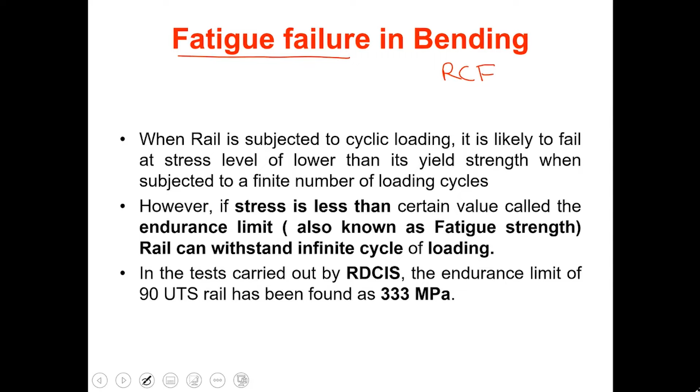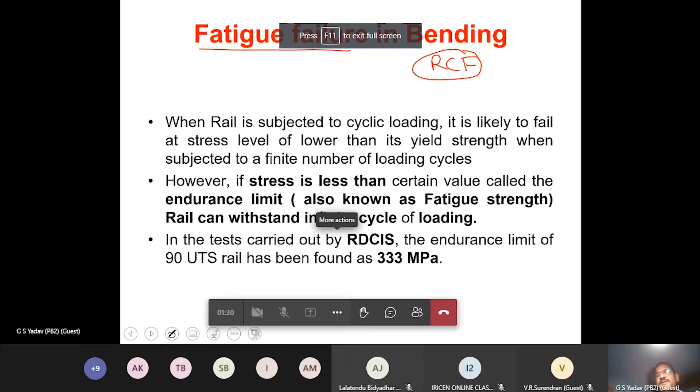As we discussed just now, it is unavoidable to have this because you cannot have the rail strength where the contact stresses can be less than the strength of the rail. It's not possible to have that kind of rail. So RCF is part and parcel of our life, it has to be there. Rolling contact fatigue failures have to be there.

Only thing is they can be controlled by rail grinding. That's why for higher axle loads, rail grinding is a must. If we are going for 25 ton axle load and if we don't deploy the rail grinding, our rails will fail at very low GMT.

These are basically, I cannot discuss these things in detail because this is about the fatigue phenomena and that takes a lot of time to discuss everything. I just explained you the basic concepts.

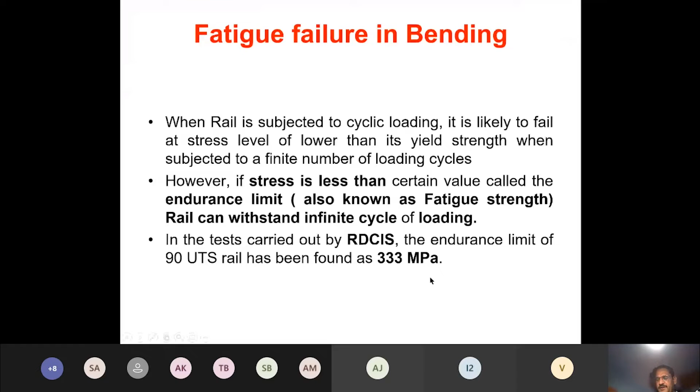But now our rail is subjected to the constant stress that I told you. Constant stress such as residual stress, thermal stress, and some other kind of stress, such as those flex laying of rails on curves. So our rail is not only subjected to the cyclic loading, it is subjected to the constant stress also.

So our loading is not fully reversible, right? It will have more value towards tensile stresses, less value towards compression stress, especially at the critical location, which is the foot center in our rail.

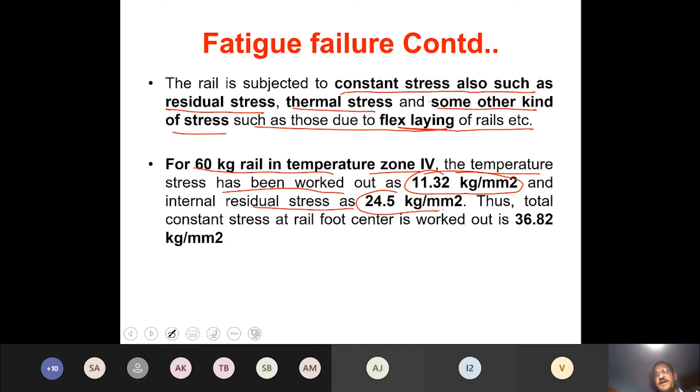And for 60 kg rail in temperature zone 4, we have calculated that temperature stress is 11.32 kg per millimeter square. Residual stress is 24.5 per millimeter square. Thus, the total constant stress at rail foot center, this is the critical location for our rail, is worked out as 36.82 kilogram per millimeter square. So this is sort of a constant stress.

Here, constant does not mean like always this is the stress, because temperature stress will not be available always, but it is available for a longer duration as compared to the wheel loads. So we take this as the constant stress, the 36.82 kg per millimeter square.

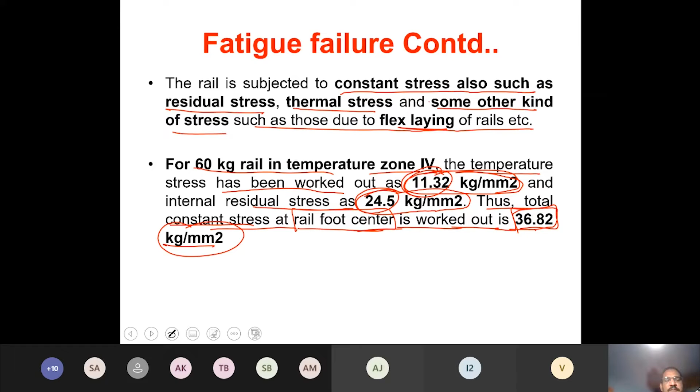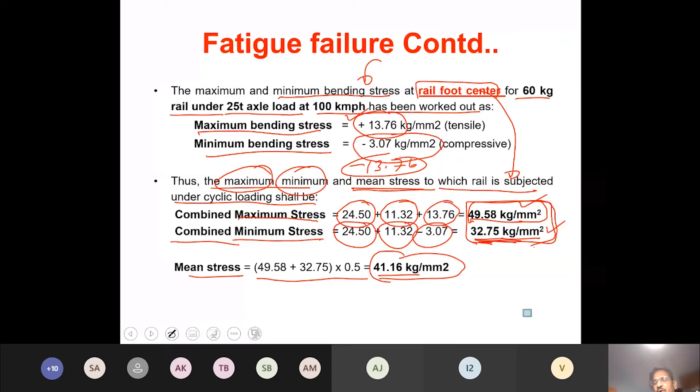And both stresses are tensile. So mean stress is 41.16. Now for these things, this is maximum stress, minimum stress, and mean stress. We have to work out what is the range in which our rail stresses lie, or what is the permissible range. We have to work out the permissible range for the mean stress as well as for the endurance limit.

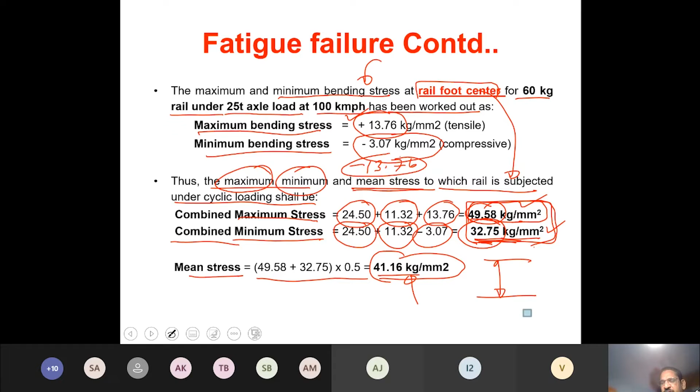So that permissible working range, from the Smith diagram, comes out to be 46.8 kg to 35.5 kg per millimeter square, as against the required range. The required range we worked out on the previous page was 49.58, 32.75. So this is my required range, for infinite life.

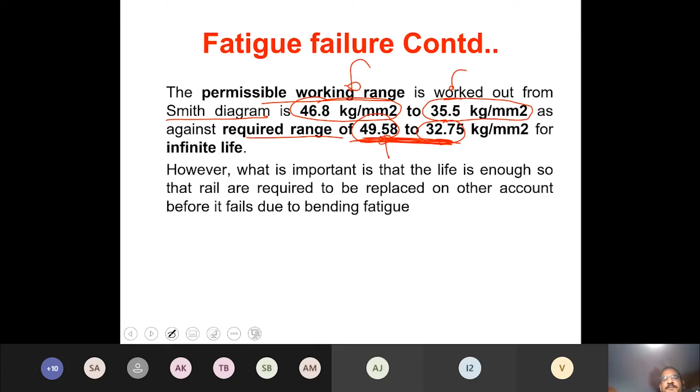But the permissible range is this. But I required this much. This means permissible is less than my required range. So I will not have the infinite life as far as bending fatigue is concerned. I am not going to get the infinite life for this rail.

But getting infinite life in the bending strength is really not important. What is important is the life due to bending should not be less than the life of the rail due to other considerations. What are other considerations? One is RCF, rolling contact fatigue, and then another is wear. So if I worry too much that I want to get the infinite life due to this bending fatigue failure, then there is no point in that, because my rail is ultimately going to fail either due to RCF or I am going to replace the rail on wear account.

So what should be your requirement is that the life under this bending fatigue should be more than the life under RCF or wear. So my rail should not be required to be replaced due to bending fatigue. In any case, the rail will be required to be replaced either due to RCF failure or due to excessive wear. So this is the whole theory according to which the rail design is done, by calculating the rail stresses and by calculating these permissible ranges.

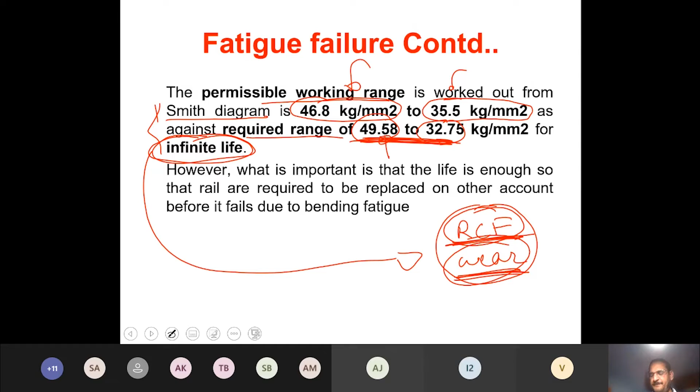Okay. So, any queries on this? Okay. Now, what is the future planning for Indian Railways? What is the current status? Current status is that we are using 90 UTS rails.

From that, we have gone to 90 UTS. We can call it conventional rails. We have gone to R260. R260 is also 90 UTS, but with better yield strength. Here, the yield strength was 52% of UTS. Here it is around 62% of UTS. So by slightly changing the chemical composition and by better rolling process or manufacturing process, we are able to improve the yield strength. So our rail, as far as yield strength is concerned, has become safe even for 25-ton loading.

But still this R260 rail is found wanting when we calculate the contact shear stresses. So the next step is that we have to go for 110 UTS rail, and this has been suggested for 22.9 ton and 25-ton axle load. So this is going to be a universal rail. But when we use higher strength rail, they become more brittle. They become more susceptible to fractures.

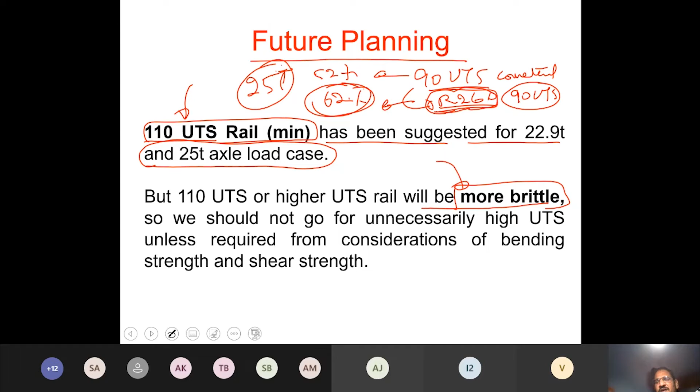Okay, so it's not something like we are getting only benefit. So we cannot increase the UTS indiscriminately because it is going to make the rails more brittle. So there is a trade-off between this. But of course, from shear stress consideration, there is no option but to go for 110 UTS rails. And when we go for 110 UTS rails, and when we operate 25-ton axle load, then grinding is inevitable. Grinding has to be there.

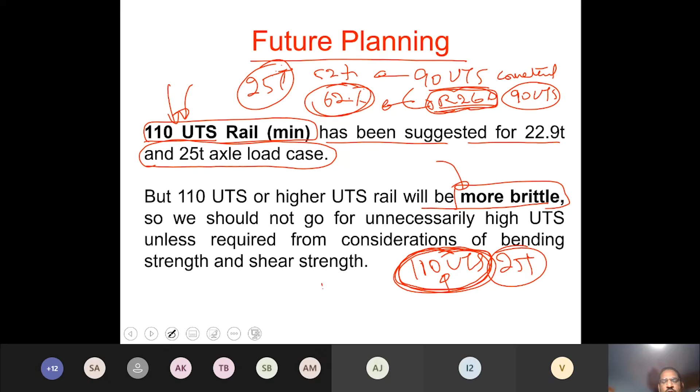So grinding क्या करता है? Grinding basically rail को artificially wear create करता है। We grind out or we remove material from the rail top, right? So it is basically artificial wear on the rail. So grinding becomes important for higher UTS rails. Otherwise these rails will have more RCF failures, right?

And in the interim measure that I explained, we have gone for this R260 rail, which has given us 550 MPa yield strength. UTS is same, 880, right? So this is the interim thing we have done, and some slight changes in the chemical composition has been done as compared to our normal rail. Minor changes here and there. I think main change in the manganese में change कुछ किया है।

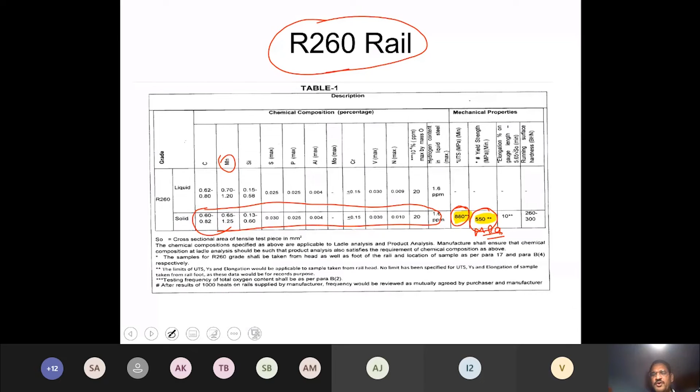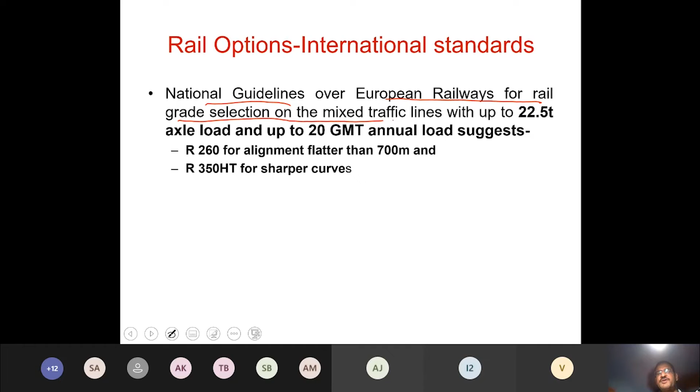Now what are the rail options available internationally? The national guidelines of European railways for rail grade selection on mixed traffic lines with up to 22.5 ton axle load and up to 20 GMT annual load suggest R260 for alignment flatter than 700 meters. हमारे यहाँ already ये axle load है rather more than this 22.9 and mixed traffic है, and GMT भी on most of our routes है more than 20 GMT. Right, but we are using a rail which is inferior to R260. On European standards, they are using R260 rail for alignment flatter than 700 meters, so curves flatter than 700 meters. For curves sharper than 700 meters, they have an R350HT rail.

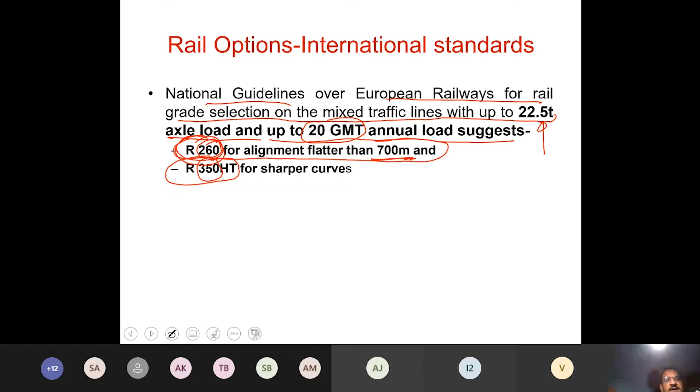Basically, this is a heat treated rail। और यहाँ R260 में 260 is basically hardness, and here R350, 350 is hardness. So this rail is for curves sharper than 700 meters. These are the standards on European railways. हमारे जो अभी current standards हैं, even though our loading is higher, 22.9 tons, they are inferior to these standards. Okay, but of course now we have adopted R260, so we are at par with them.

R350, what is the UTS, sir? R350 में भी इसको क्या किया, head hardening करके same UTS रख के इसकी hardness बढ़ा दी है। It is the same UTS but its hardness is increased by heat treatment। हीट ट्रीटमेंट करके दो तरीके से hardness हम बढ़ा देते हैं। एक तो हेड अकेले का भी हम hardness बढ़ा सकते हैं, तो इसको हम बोलते हैं head hardened rails। और we can do the heat treatment of the entire rail and increase the hardness of the entire rail।

Normally the process is कि आप head का hardening करके, head का heat treatment करके head की जो hardness है वो बढ़ा दो। देखो curve में क्या होता है, sharper curves में the rails become due for replacement on account of wear। जैसे आपके यहाँ भी आपने देखा होगा, if you have a curve sharper than maybe 2 to 2.5 degree, तो उसमें 90 UTS rail की जो life है ना वो 400-450 GMT में पूरा उसको wear हो जाता है। You might have experienced that।

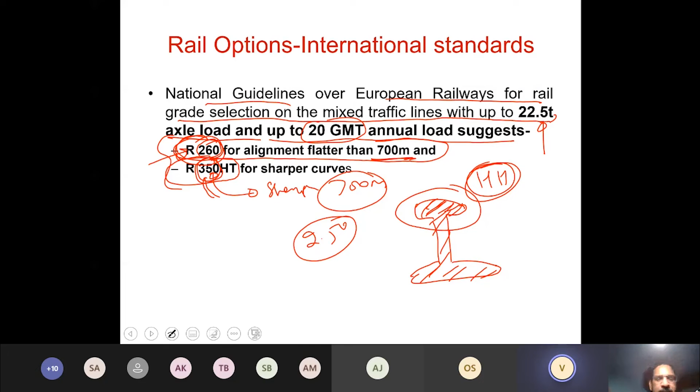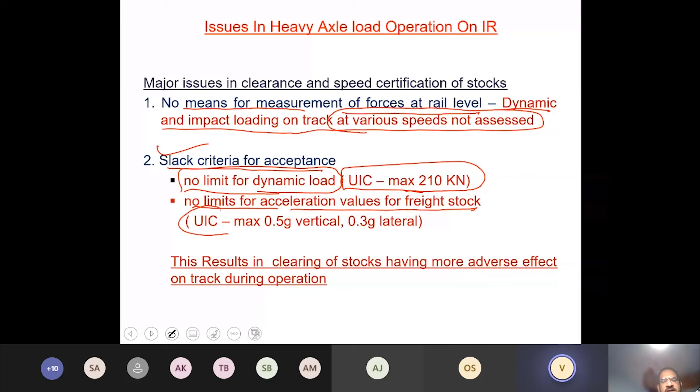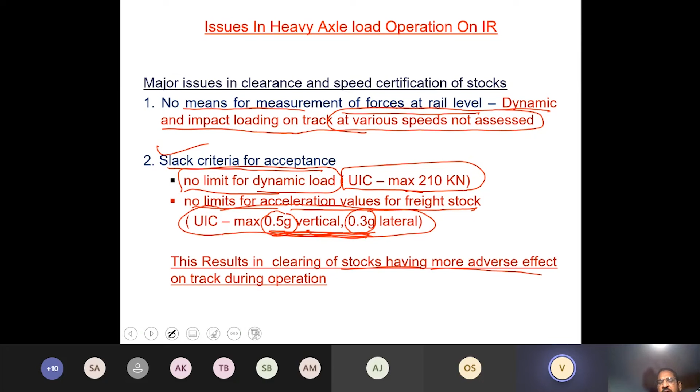Okay, and slack criteria for acceptance - for example, dynamic load के लिए अभी हमारे यहाँ कोई upper limit नहीं है। Like UIC ने upper limit lay down की हुई है कि dynamic load cannot be more than 210 kilonewton। फिर no limits for acceleration values for freight stock। As per UIC, the freight stock cannot have maximum vertical acceleration more than 0.5 g and lateral acceleration 0.3 g। For our freight stock, these values are considerably higher। So we have these issues because you can increase the rail strength and rail size, but unless you control these things, our maintenance inputs are going to increase tremendously। So these are the issues that Indian Railways has to address। This results in clearing of stocks having more adverse effect on track during operation।

Oscillation trials are done only on new stock. But when the stock becomes old due to deterioration by use, it will have more adverse effect - more dynamic augment, more acceleration. So basically we must do oscillation trials on old stock also, but that is not the practice on Indian Railways so far.

Then there's the wagon having reduced wheel diameter. Right now on DFC they are going to run trains with reduced wheel diameter for double stack container operations, to increase load carrying capacity. If this is the condemning limit, it is going to increase contact stresses and shear stress in the head, so it's going to increase RCF failures considerably. These are the issues.

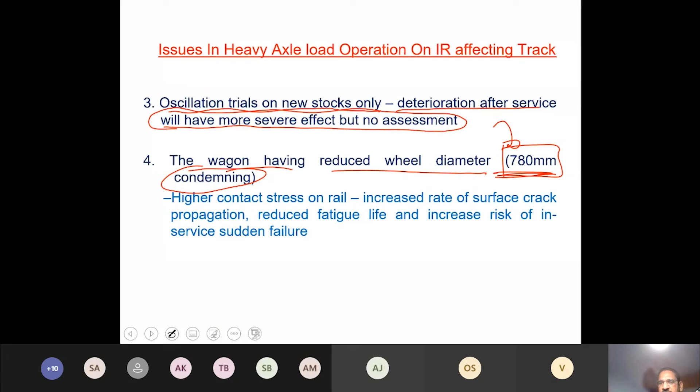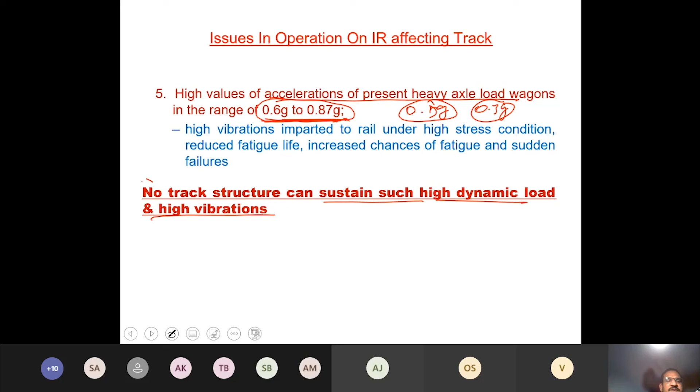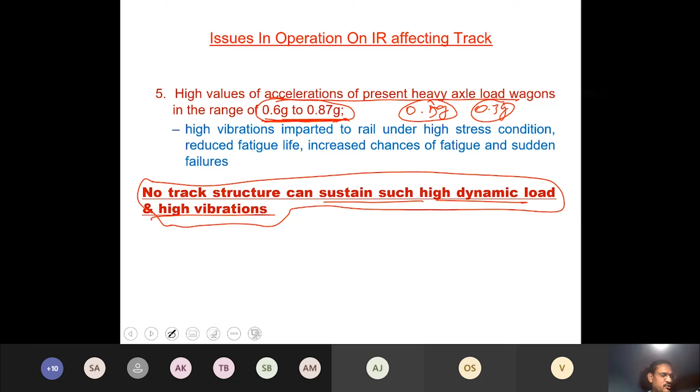Then there's the high value of acceleration of present heavy axle load wagons, 0.6 to 0.87g, whereas maximum is 0.5g for vertical and 0.3g for lateral as per UIC. Our wagons have pretty high acceleration, which imposes more dynamic load on our track. No track structure can sustain such high dynamic load and high vibrations. These are the issues Indian Railways is grappling with, and we have to address these in due course of time.

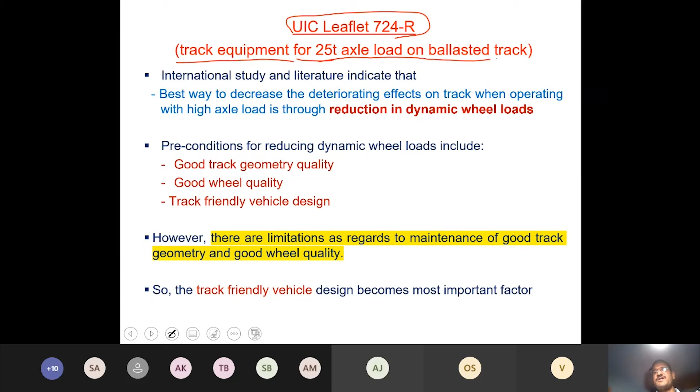Then there is one UIC leaflet 724-R which lays down the track equipment required for 25-ton axle load on ballasted track. It lays down certain guidelines.

International study and literature indicate that the best way to decrease deteriorating effects on track when operating with high axle load is through reduction in dynamic wheel loads. This reduction can be achieved through various options: good track geometry, good wheel quality, and track-friendly vehicle design. There's a limit to achieving good track geometry and good wheel quality also. The main thing is track-friendly vehicle design, so that it imposes less dynamic forces on the track - this is what we need.

Unfortunately, our wagons fail on this criteria. There is a lot to be done if we want to operate 25-ton axle load successfully and without excessive failures. So track-friendly vehicle design becomes the most important factor.

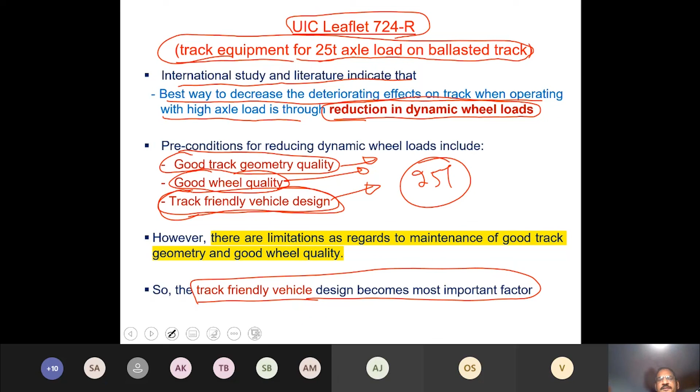On Indian Railways we have issued certain guidelines for heavy haul running: install all sanctioned weigh bridges and ensure they are kept well maintained and functional - we are not ensuring this. No overloading must be permitted, and drastic penal action should be taken against defaulters. Better enginemanship and adequate powering should be ensured to prevent stalling and wheel slippages - we are failing miserably in this also.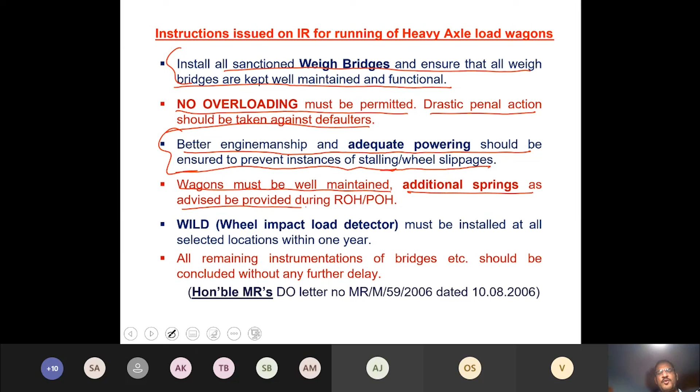Wagons must be well maintained, with additional springs provided during ROH or POH as advised. WILD must be installed at all selected locations within one year - not many have been installed and probably they are not being maintained properly. All remaining instrumentation of bridges etc. should be concluded without further delay.

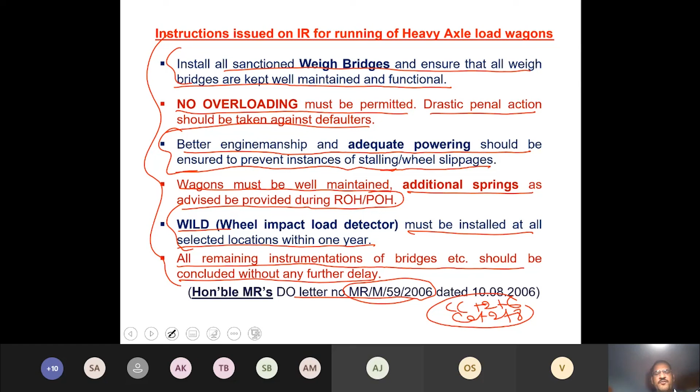These instructions were issued way back in 2006 when we started running CC plus 2 plus 6 and then CC plus 8. We have laid down so many guidelines, but unfortunately most have not been followed strictly. Anyway, so this was all about the rail stresses.

We come to the end of this discussion. The basic idea is to give you an overview that the track is subjected to certain kinds of forces and stresses, and what is the relative importance of various stresses - which ones we can control by improving rail metallurgy and rail design, and which need to be controlled during maintenance. For example, contact stresses - I cannot design the rail for contact stresses, but I have to manage them during maintenance, through rail grinding etc.

This topic may not be very relevant for the AENs; it becomes more relevant at the senior level, but it's always good to have some knowledge about this topic.

So I come to the end of my talk. If you have any queries I can answer that, otherwise my time is up.